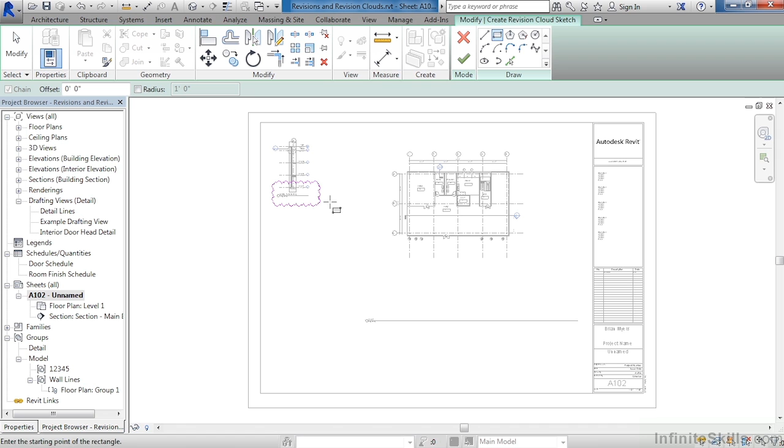If we now look at our properties, we can see that this revision is revision 1. It has the number revision 1 right underneath it here in properties, and the date that will show up in the revision is called Date 1. In just a moment, I'll show you where that information can be updated and changed.

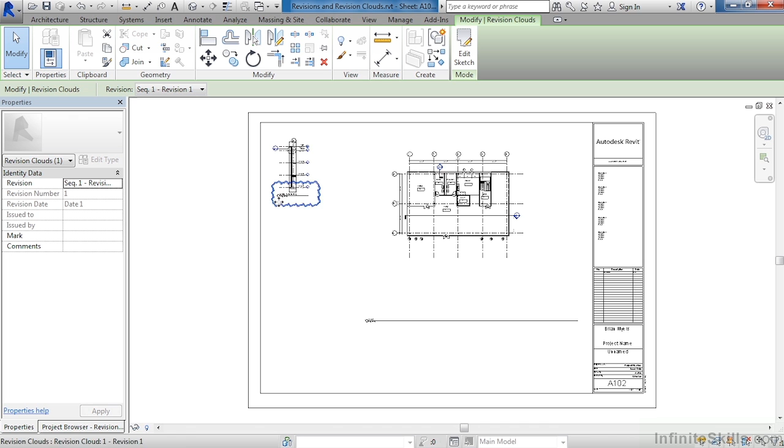Move your cursor up and select the big green check mark. We now have that revision cloud in place. If we look on our title block, we can see that the revision is now inside of the title block. To modify this information, come up to the Manage tab and select Additional Settings.

Then pick Sheet Issues Revisions. This is where all that information related to the revisions is located at. Currently, it's numeric as opposed to alphabetic. The date is called Date 1, and revision is Revision 1.

If we needed to change this to alphabetic instead, we could by clicking where it has numeric, then selecting alphabetic off of the list. The Date 1 and Revision 1, if we wanted to put in today's date as well as some sort of revision information, we could do that here. We will talk about the rest of this a little bit later.

But another thing I would like to do is add yet another revision to this information. To add a new revision, just come up and select the big Add button in the upper right-hand corner. This will add Revision 2, which can also be either alphabetic or numeric, and can have its own information associated with it.

Come down to OK. You will notice that even though we've added a second revision, it does not show up here inside of the title block. The reason is that revision information is associated with the revision cloud. Since there are no revision clouds, either inside of a view that would be on the sheet or on the sheet itself, there's no revision information showing up inside of the title block.

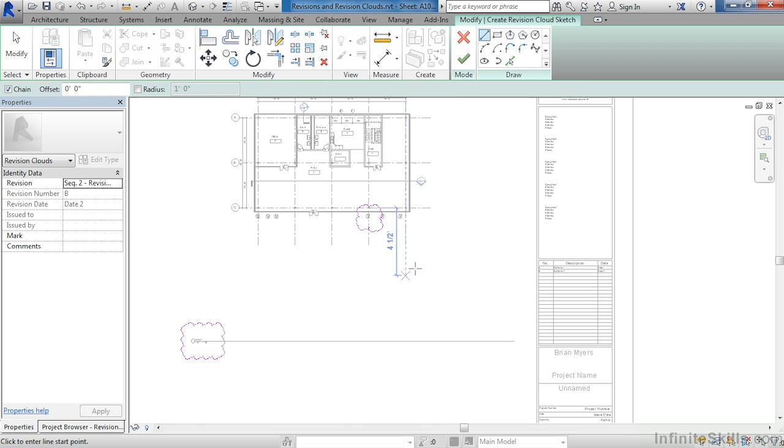Draw a little window around here that will be our revision cloud just by clicking once, then clicking again. Let's also have a second revision, but this time let's use one of our other drawing tools. I don't care if it's the circle or the polygon, but in this case I will be using the line tool, and I will manually draw in the shape that I want this to be, then click on the big green check mark. By doing this, both of these are associated with revision 2.

If we look in the title block, we can see that revision 2 is now there, and this is the letter B. Come up to the Manage tab, select Additional Settings, then go to your Sheet Issues and Revisions to see its properties.

A couple of other properties available here underneath Sheet Issues and Revisions include Issued and Show. Issued means that if Issued is checkmarked, no other revisions can then be used that are revision number 1, because this has already been issued.

Where it says Show, Cloud and Tag, make this be None. This means that the cloud and then the tag that we would eventually put in would not show up. Move down here to OK.

Zoom out, and you will notice that revision 1 no longer shows up, because in that previous dialog box, we told it not to show up.

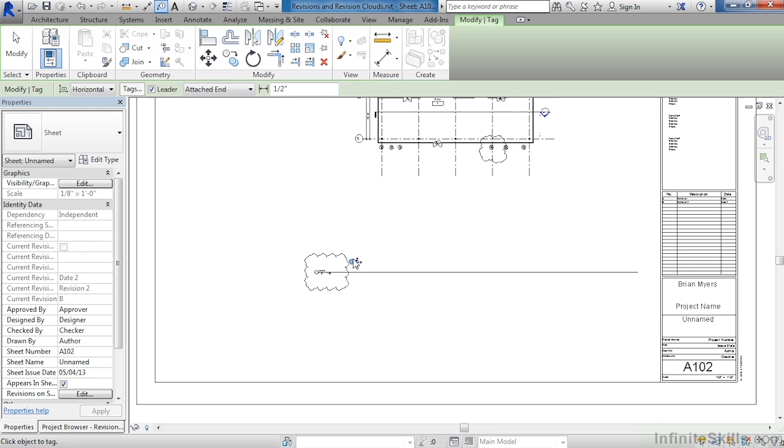If we need to tag our revision clouds, we can do that as well. Just come over to the Annotate tab, Tag by Category, click the revision cloud. By doing that, we can now see that this is revision B, which of course corresponds with the information that we have over here.

If we go back to the Manage tab, once again come down here to Additional Settings, Sheet Issues and Revisions, we can see that Cloud and Tag is the option, and that's the reason why we can still see it.

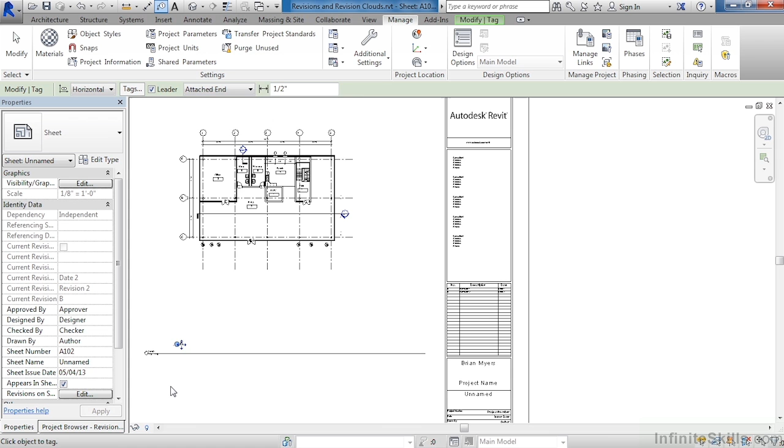It's still turned on. If we decide to only show the tag and not the cloud, we could then click OK one more time, and now we can see down here that all that's left is the tag. If we need to turn that leader off, because right now it's not pointing at anything, make sure to select the tag, come up to Leader, and now you will see that leader goes away, the leader that had been pointing to the original revision cloud.